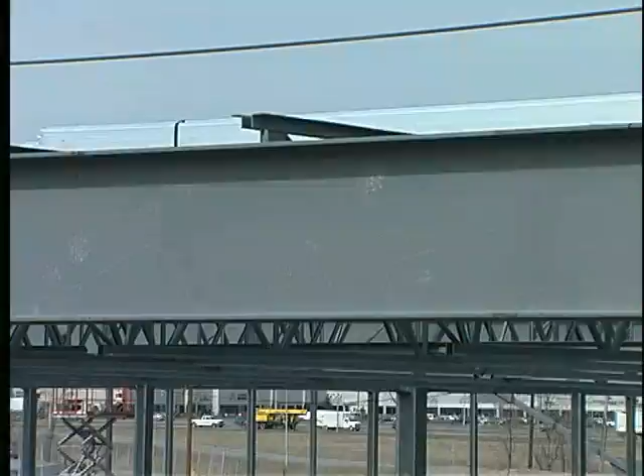The Steel Structures Education Foundation is an organization established to foster increased awareness of steel as a building material and to expand the knowledge and understanding of the use of steel in construction.

Years ago, when we looked ahead to the urban landscape of the 21st century, we imagined a skyline dominated by multi-story buildings. That future is now here. But the modern urban environment has an unexpected number of single-story structures, and many of those are framed in steel. In this program, we look at the design and construction of the single-story building.

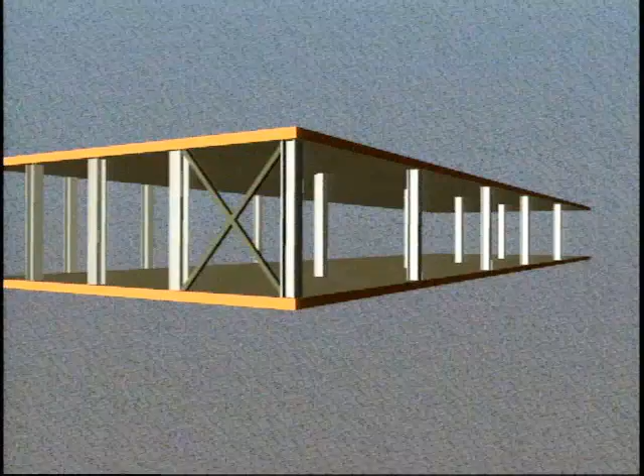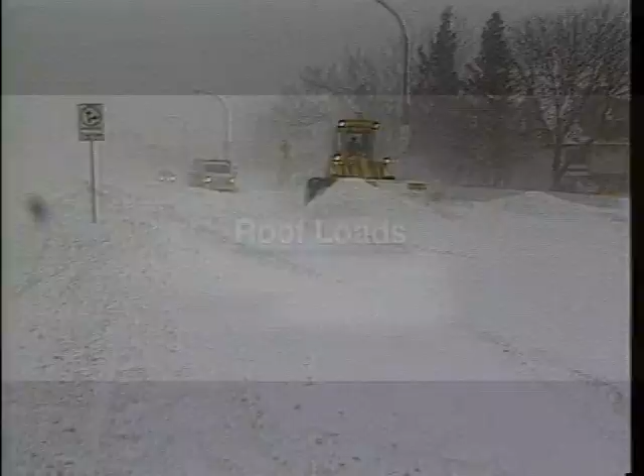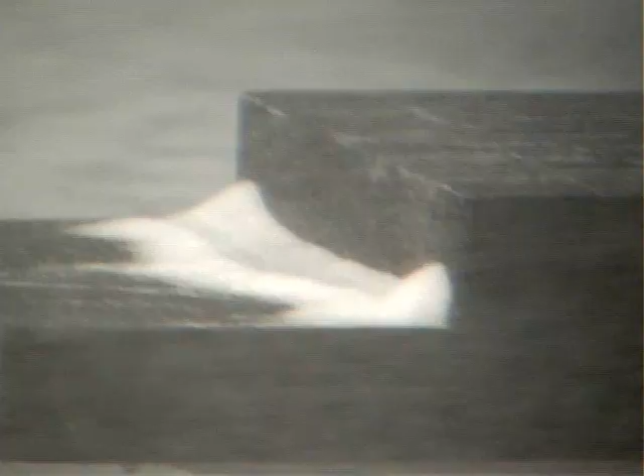We examine the vertical and lateral loads that these buildings must carry and the structural systems used to transfer the loads to building foundations. We start with the loads. In Canada, one of the most severe loading conditions to consider is snow. Snow can pile up locally, especially where there are changes in roof elevation, as this model simulation demonstrates. And when rain is trapped in the snow, the load substantially increases.

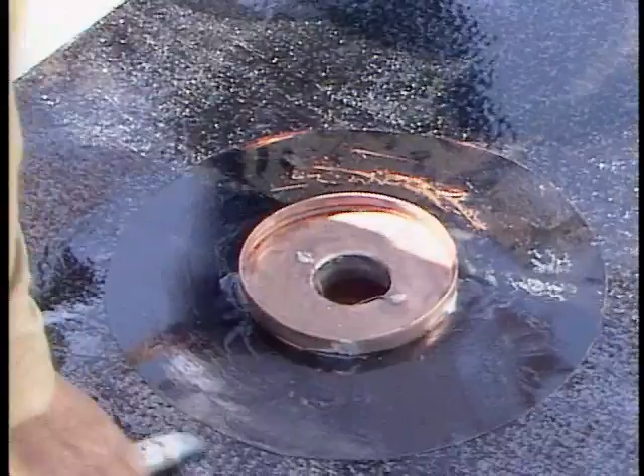It's not surprising that structural failure in building roofs is most frequent under snow load conditions, and rain must also be considered as a separate load source. Designing for rain loading is often compounded by local bylaws. Some municipalities restrict the volume of runoff from building roofs.

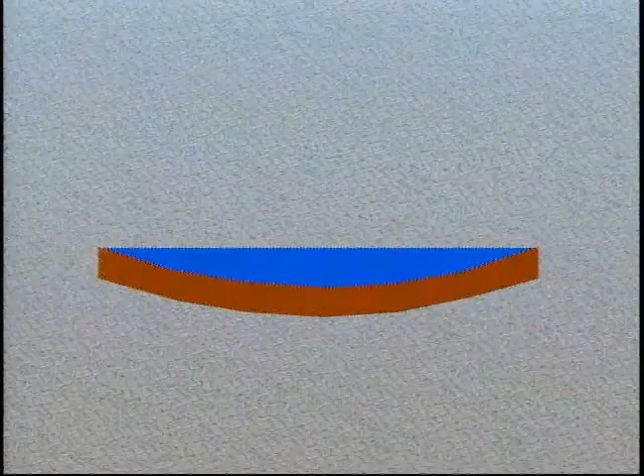In these cases, the design must allow for the extra load of retained water, and the load is not always evenly distributed. Roof frame deflection can cause the rainwater to pond in low areas, causing locally heavier loads. Roof stiffness to avoid deflection and drains at low points are therefore two important design considerations.

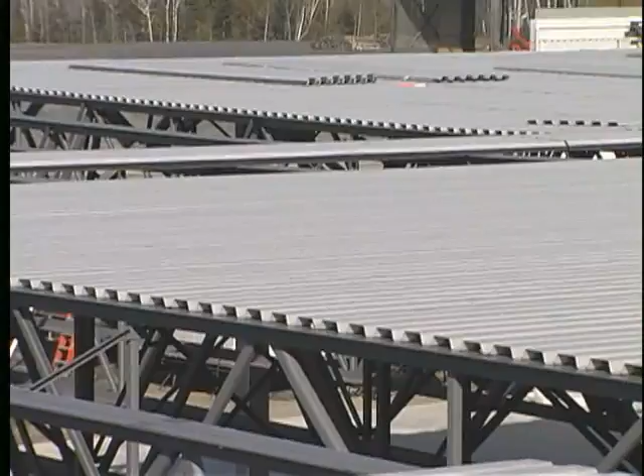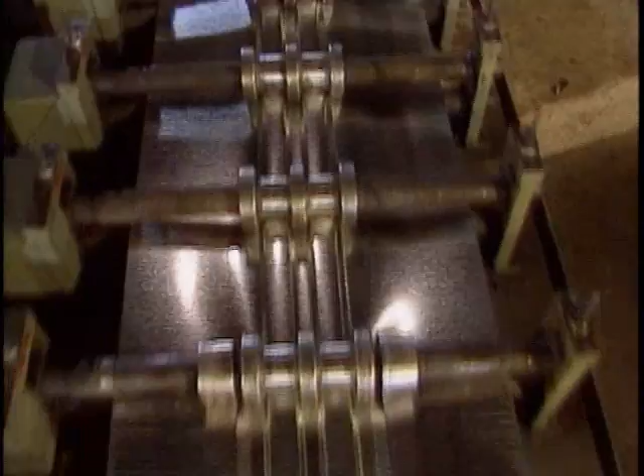To carry roof loads due to snow and rain, sheet steel is the first line of defense. The designer chooses one of a number of standard roof deck profiles based on deck span, sheet steel thickness, and anticipated roof load. A coil of sheet steel is roll-formed into the deck profile selected, and a flying shear cuts it into suitable lengths.

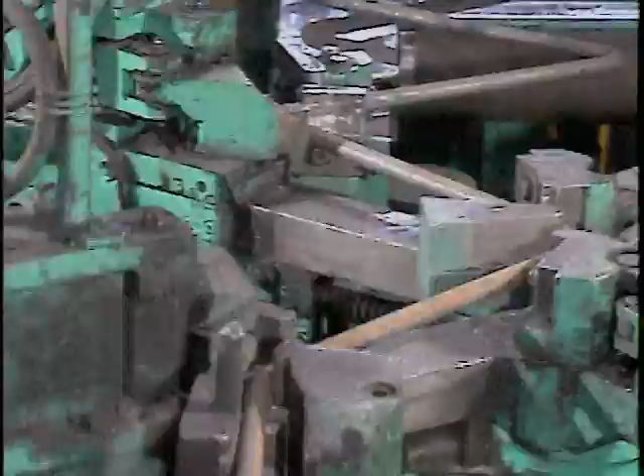Open-web steel joists, simply called joists, support the roof deck. Each manufacturer uses its own proprietary joist design, selecting components that comply with the specified performance criteria. Assembly line fabrication reduces overall costs.

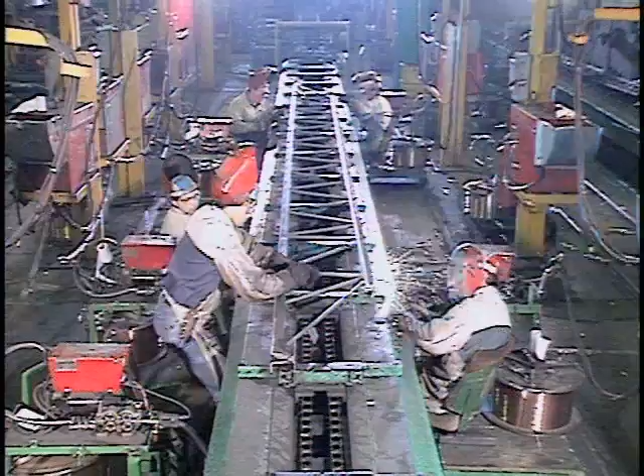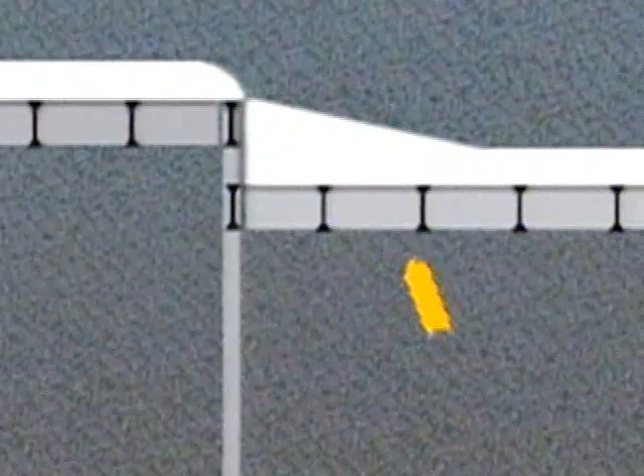In areas where there are extra loads from deeper snow, designers will often call for a joist with a larger capacity to support the additional weight and place the joists at the normal spacing. But the production of these few heavier-duty joists is apart from the assembly line and can drive up costs.

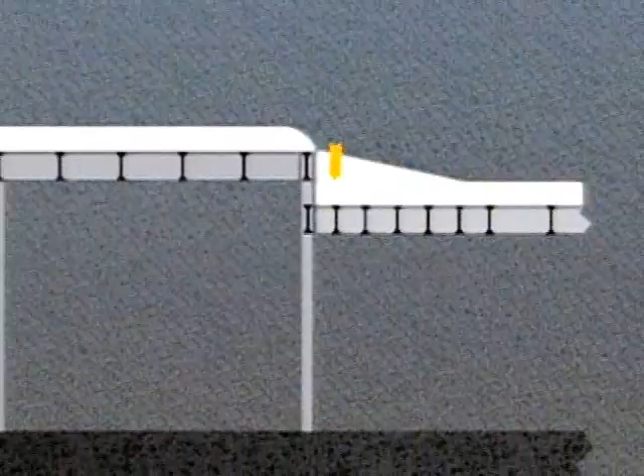It may therefore be more cost-effective to use the same joist design that's in the rest of the roof and place them closer together where necessary to increase load capacity. Reducing joist spacing also reduces the deck span, thus increasing the load capacity of the roof deck. This may also avoid the need to adjust deck strength in areas of heavier loading.

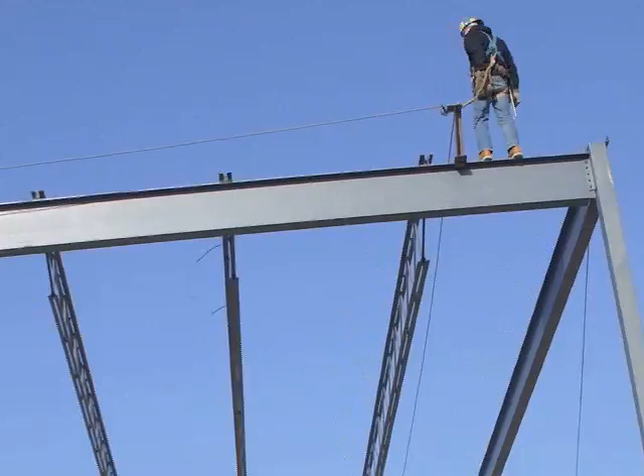The next element in the steel framing of a one-story building is the girders. These are the primary supports for the joists. They are often cantilever girders, also known as Gerber girders, named after the designer Heinrich Gerber. More than a century ago, he used cantilever girders in European bridges to achieve the benefits of continuous girders, with the structure remaining statically determinate.

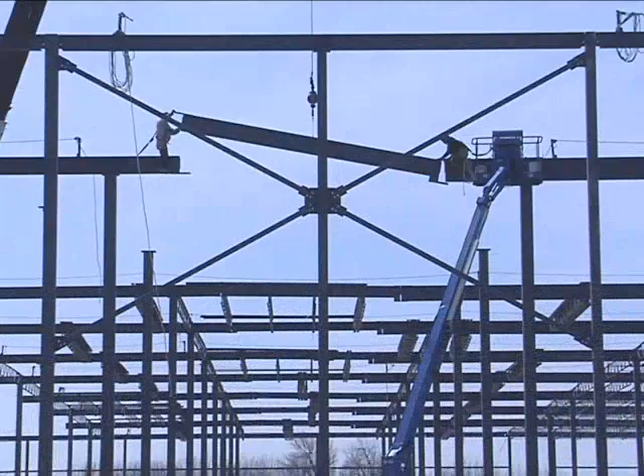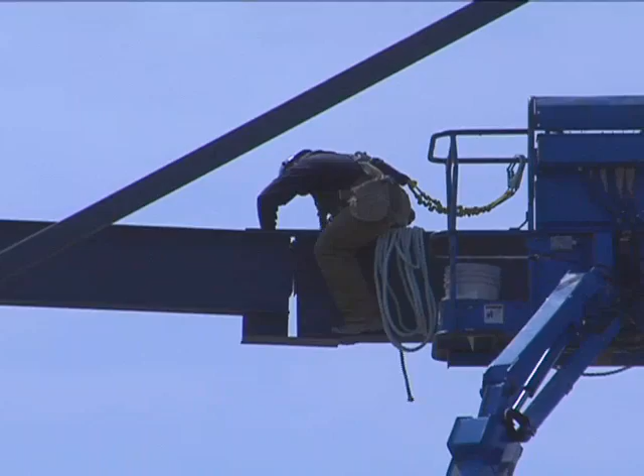In buildings, Gerber girders are continuous over adjacent columns, with simple span drop-in segments attached to the ends of the cantilevers. This continuity over the supports reduces deflections and simplifies connections. The system also derives significant economic benefits from material savings, easier fabrication in the shop, and faster construction in the field. There is one critical fact in the consideration of this design.

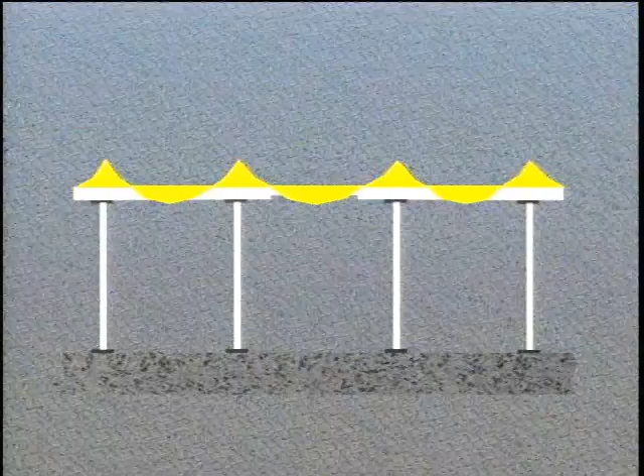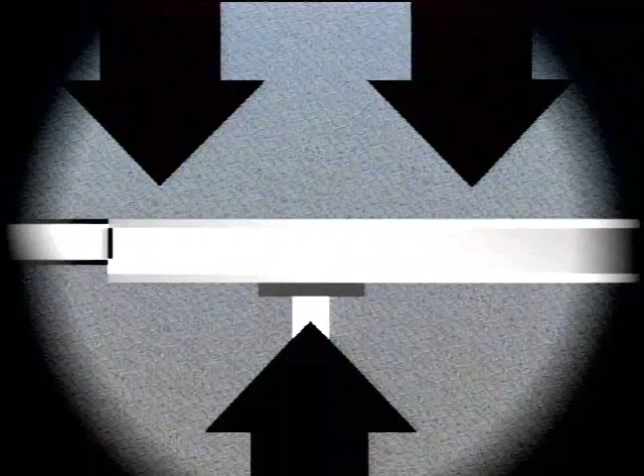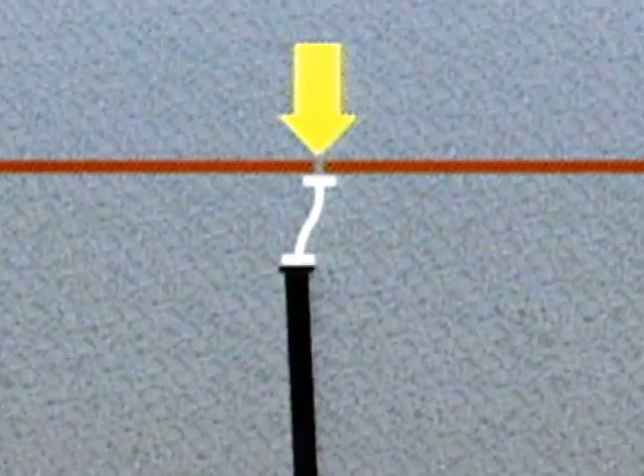The maximum bending moment under uniformly distributed loads frequently occurs over interior columns. This point of maximum negative moment coincides with the maximum shear force in the girder. Therefore, stability of the girder column joint is an essential factor in the design. When roof loads are low, as they are most of the year, the assembly usually remains stable. However, as loads increase, there is a tendency for the bottom flange of the girder and the top of the column to move laterally. This can create instability.

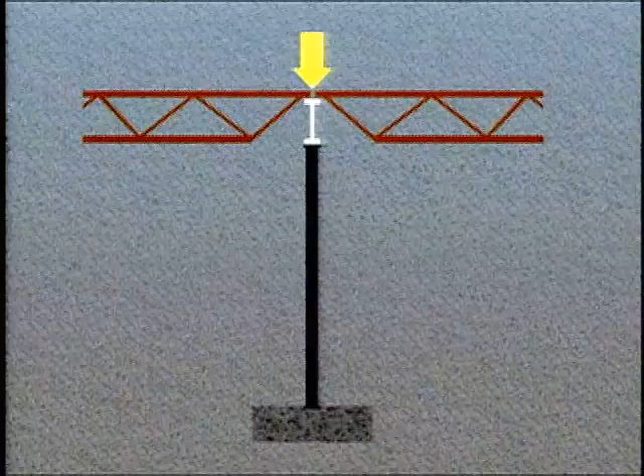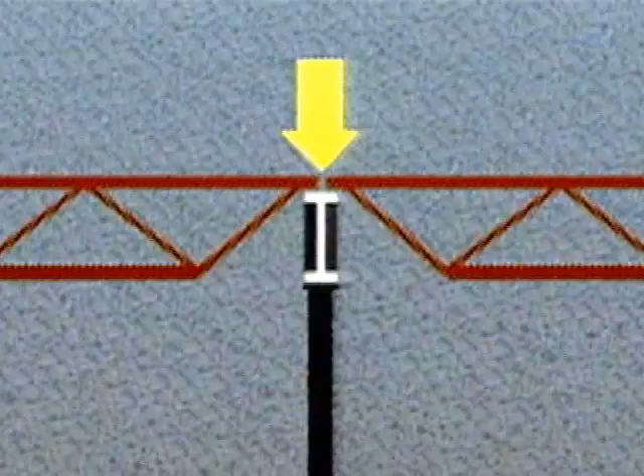The solution is in the framing details that transfer loads to the girder top flange from the joists. Good practice dictates that there will be a joist at or near the column. An extension of the joist bottom chord may be used to tie and stabilize the girder bottom flange, thus stabilizing the top of the column. Alternatively, stiffeners on the girder web above the column may be sized to provide column continuity, joint stiffness, and joint stability. In fact, designers will often combine these two systems for additional safety.

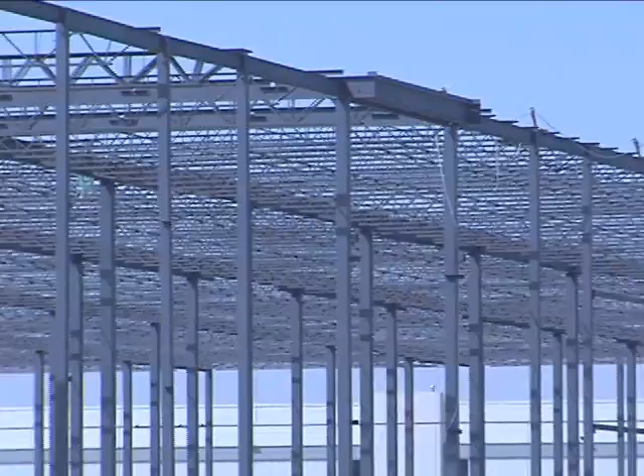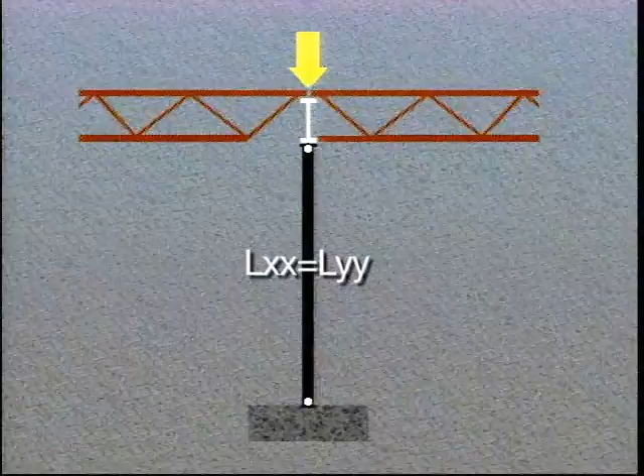Continuing our look at the single-story steel structure, the next step is the columns, interior and exterior. We start with interior. These columns are normally designed as axially loaded pin-ended members that are laterally unsupported along their length. Their design length is approximately the same on both principal axes. This symmetry, combined with compression-only loading, usually makes square hollow structural sections the most economical choice.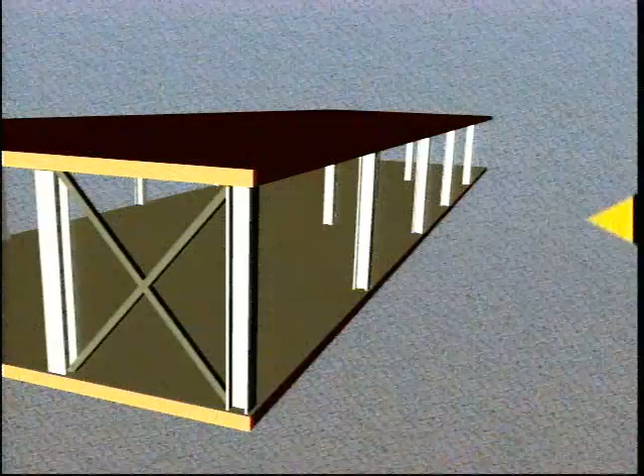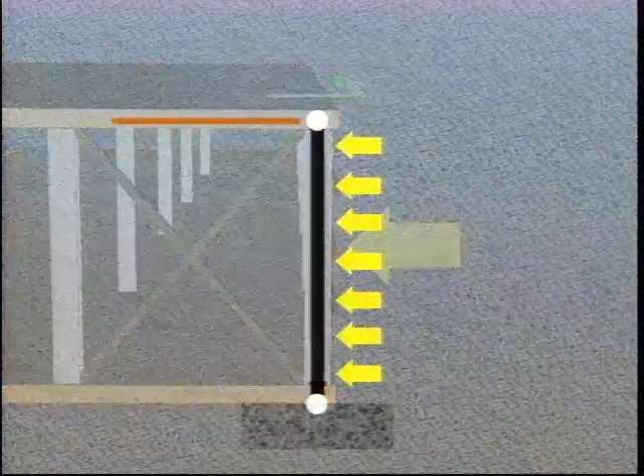Exterior columns often involve a different set of design criteria. First of all, there are wind loads to consider. Wind produces loads on both the windward and leeward faces of the building, as well as uplift forces on the roof. Sometimes building walls are capable of spanning from the foundation to the top of the building. This distributes wind loads in more or less equal shares to the roof level and the foundation. In these cases, the exterior columns can function primarily as axially loaded members.

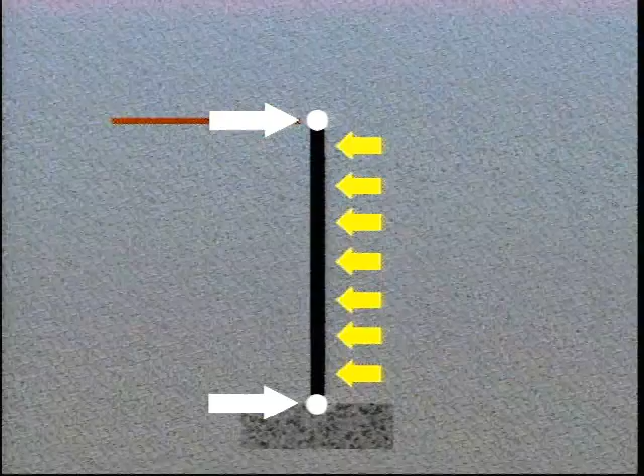However, much more frequently, the wall consists of cladding that is attached to the exterior columns. Wind loads on the cladding are locally transferred to secondary framing members called girts, and from the girts to the exterior columns.

Girts are used in a horizontal plane with sag rods to support them temporarily, and with their spacing usually determined by the load capacity of the cladding panels. The columns then must support both wind loads on the wall applied through the girts and axial loads from the roof. In many cases, girts are attached to columns on their outer flanges.

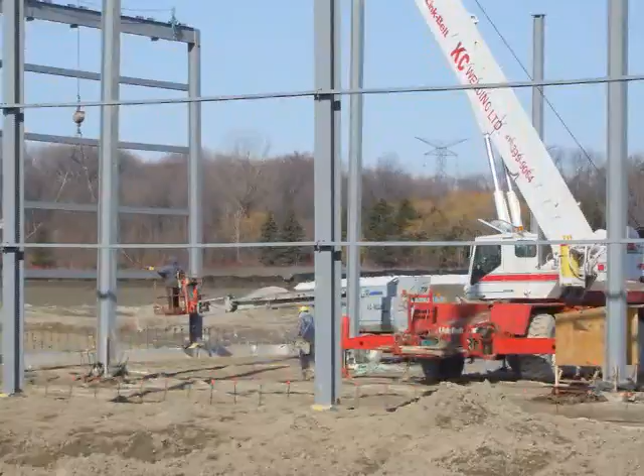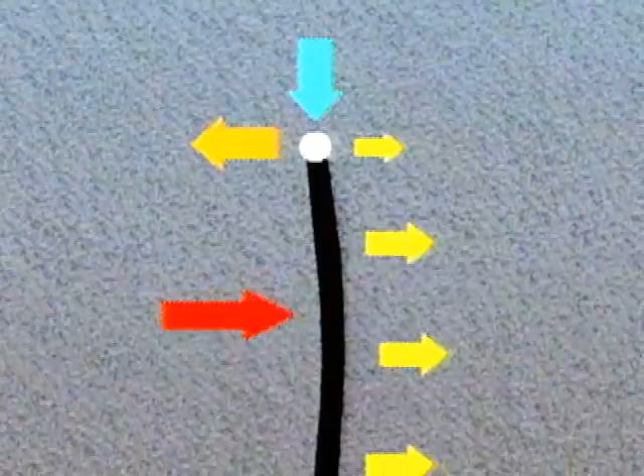These horizontal loads may reverse with the wind direction, which makes it necessary to consider stability of the inner column flange. To supply both axial load capacity and bending capacity, designers will usually choose a column with greater strength on its primary axis, such as a wide flange column section.

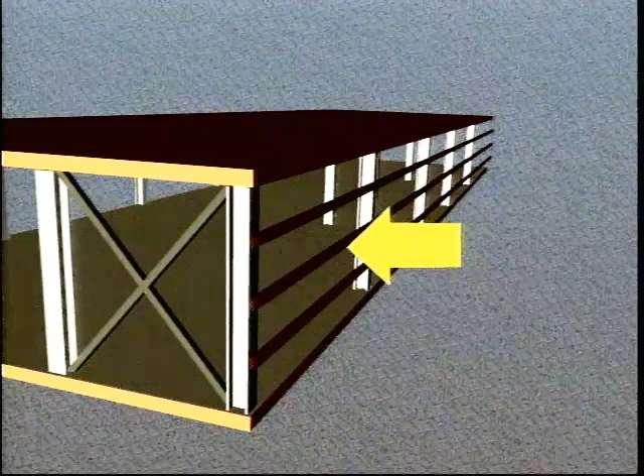The spacing between primary exterior columns is usually a reflection of the interior column grid and may be too great for economical spans of the wind girts. Secondary columns placed between the primary columns will reduce the girt span. These additional columns are known as wind columns. In fact, they might well be called wind beams because their major function is to resist horizontal loads from the wind girts.

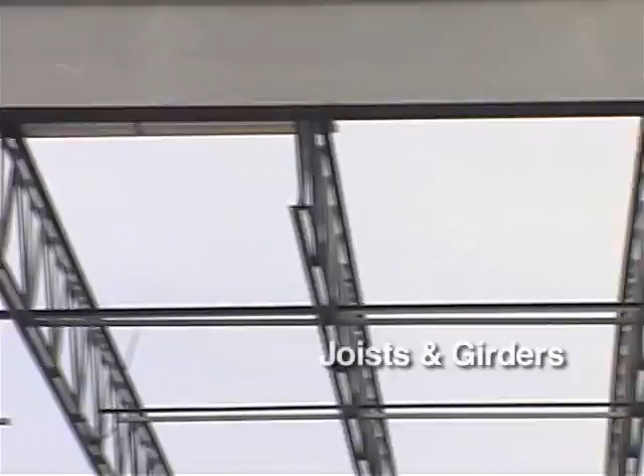These are the main framing elements in the construction of a single-story building: the roof deck, joists and girders, interior and exterior columns, girts and wind columns. Now, let's see how these framing elements work together in tandem with the bracing to provide overall building stability under gravity loads and to resist horizontal loads from wind or earthquake.

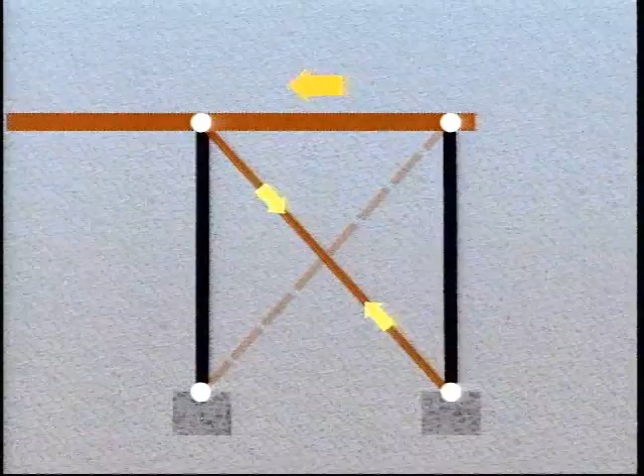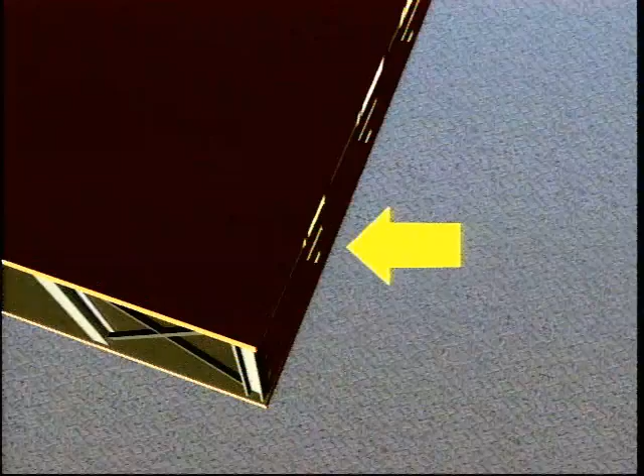Loads at the bottom of exterior columns are transferred directly to the foundations. Loads at the top of exterior columns must be resisted at the roof level. The designer must find a way to distribute these horizontal loads to bracing elements, which quite frequently can only be accommodated along the perimeter of the structure. How do designers transfer loads to these isolated elements? Most often, they use the roof as a structural diaphragm.

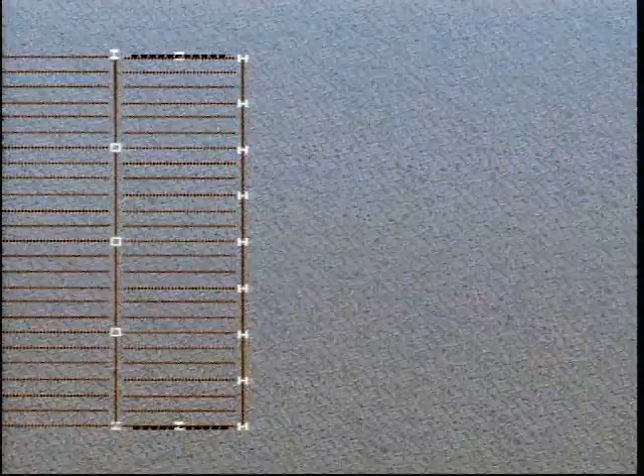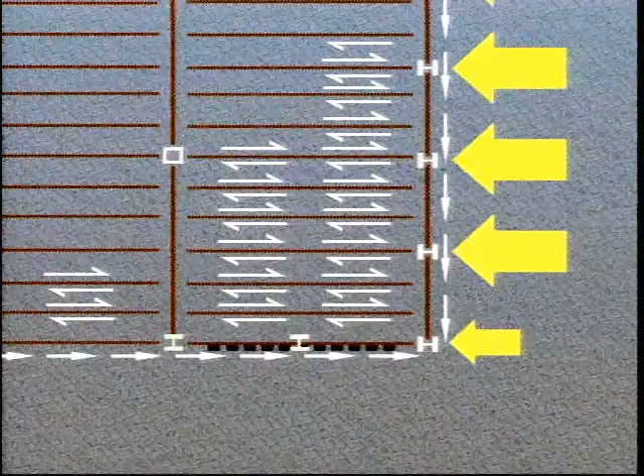A steel roof deck with joists acting as stiffening elements forms the structural diaphragm, which must have the capacity, both overall and internally between adjacent elements, to transfer forces across its width. In addition, the boundary of each diaphragm must have sufficient connections to transfer forces through bracing elements to the foundations.

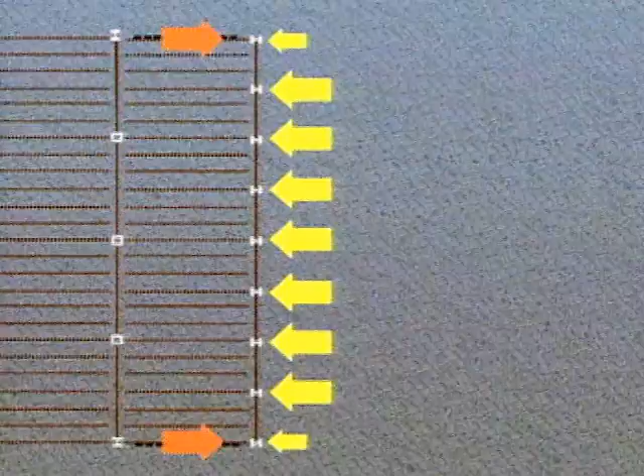Sometimes a steel deck diaphragm alone may not be capable of distributing forces applied on the building. In such cases, a bracing system in the plane of the roof supplements the diaphragm locally where stresses are high, or may even replace the deck diaphragm.

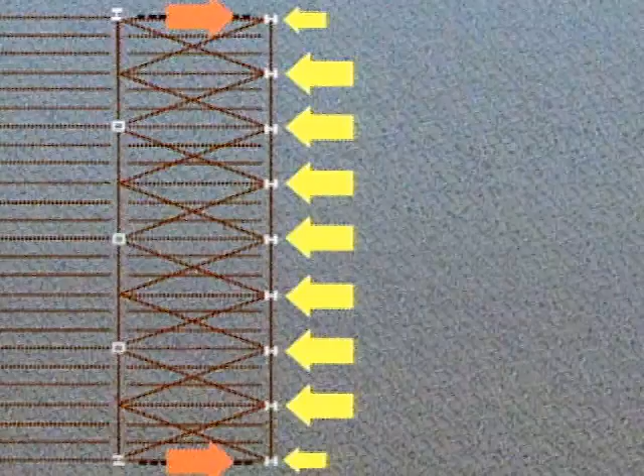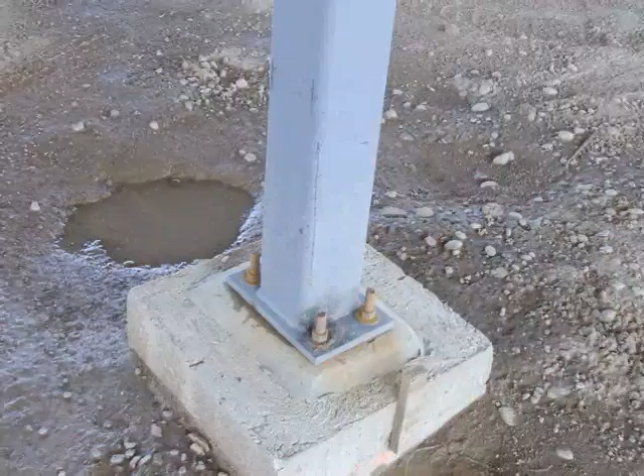Now that we have seen the loads and the components that support them, let's look more closely at actual site construction. The building contractor constructs footings to plans and specifications, complete with anchor bolts. The shop fabricated columns with base plates are erected and shimmed to the correct elevation, ready for grouting. As an alternative, leveling plates can be installed and grouted before the columns are erected.

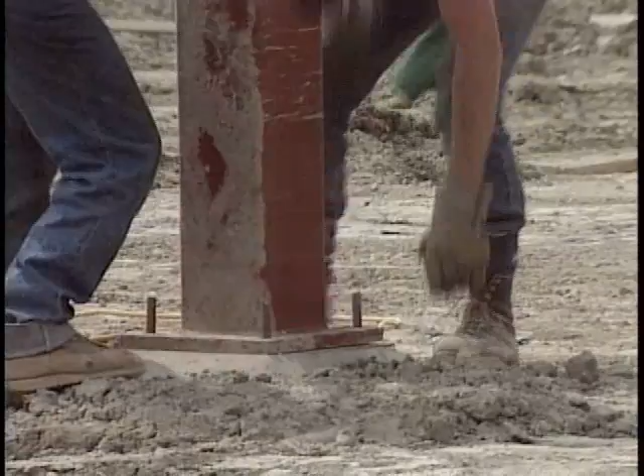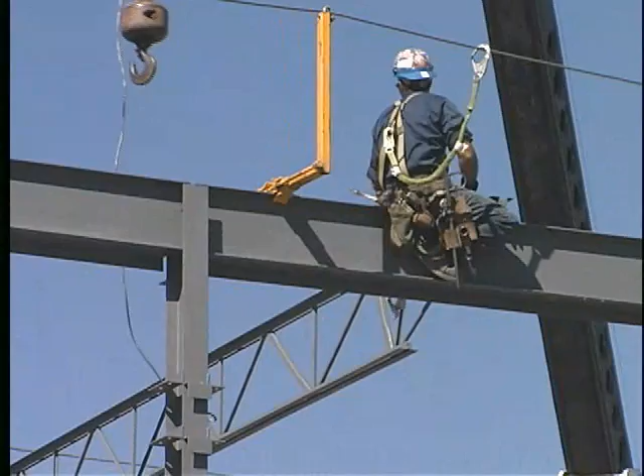After several columns have been bolted down, the cantilever segments of the girder system are erected. Drop-in spans complete the lines of the primary framing elements. Usually a tie joist, that is, a special joist with a bottom chord extension, is placed on the column grid lines. Erectors use this bottom chord extension, along with plumbing cables, to plumb the frame.

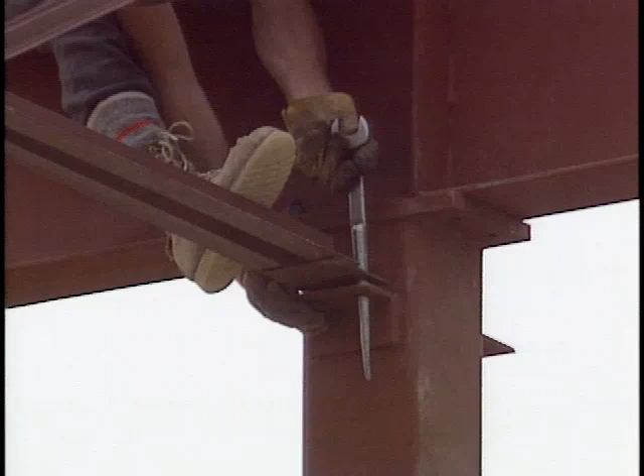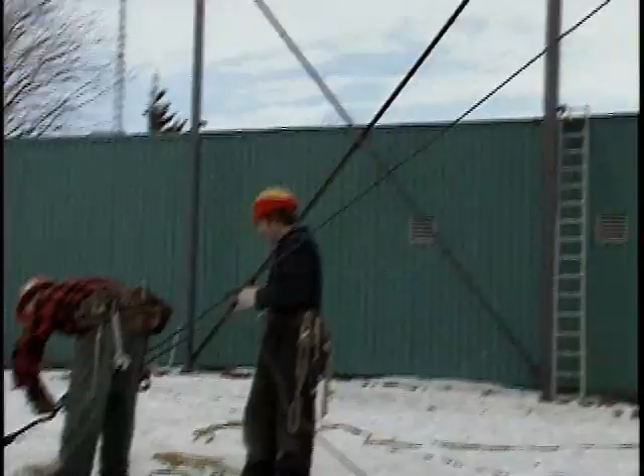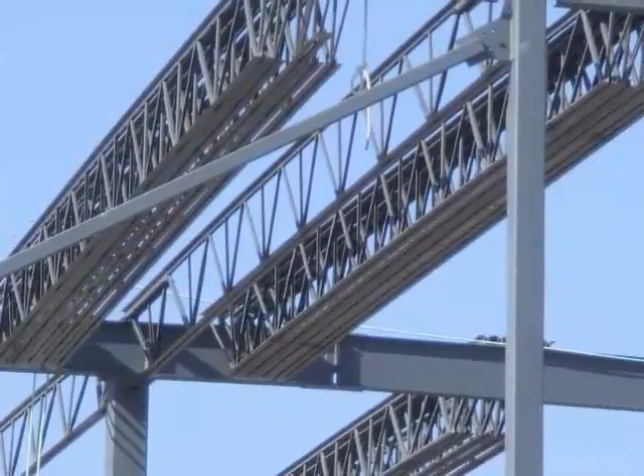This is the point in the girder where we see the large negative bending moment discussed earlier. To stabilize the joint, we connect the joist bottom chord, ensuring stability of the girder bottom flange and the top of the column. After girders are placed and stabilized by tie joists and plumbing cables, bundles of open web steel joists can be placed on the frame. They are then spread to the specified spacing and attached to the girders by bolting or welding. Bridging is then installed to brace the joists.

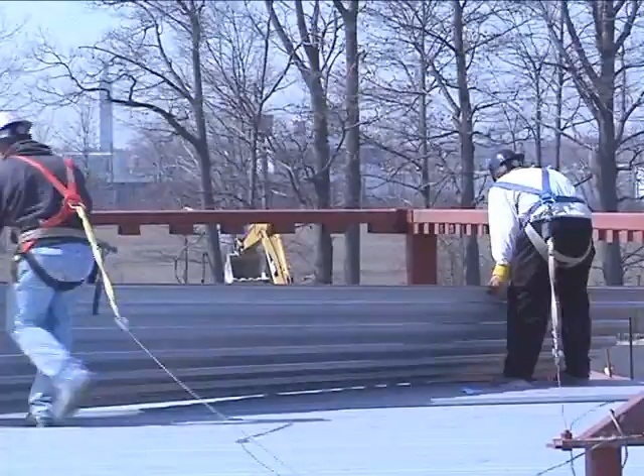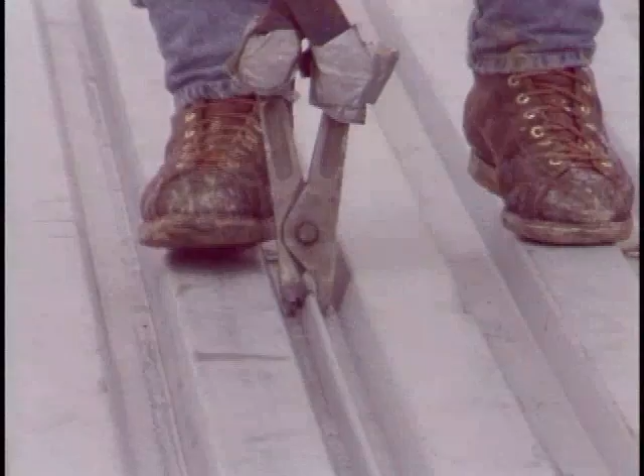With joists and girders complete, the third element in the roof structure can be laid, the steel roof deck. The erector places panels side by side on the joist top chords and welds or mechanically attaches each to the joists. Side seams are connected for vertical load carrying capacity, with additional connections for roof diaphragm capacity if required.

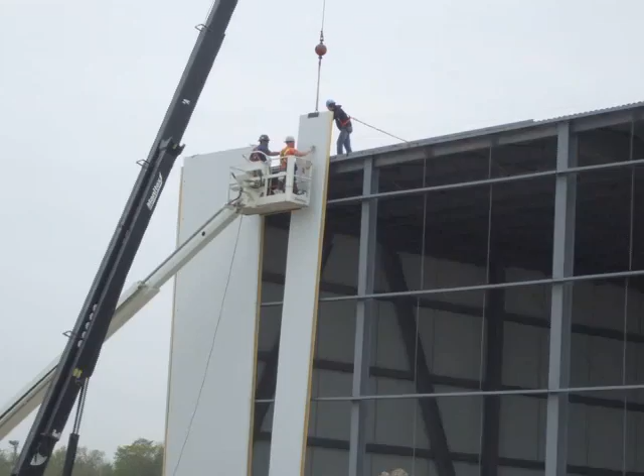Now, let's take a closer look at the building wall. There are many different wall systems to use. Wall panels may be factory manufactured, and these large elements are shipped to the site. The wall may also be manufactured in the field, beginning with a liner sheet attached to the structural girt system, followed by subgirts, insulation, and finally, the exterior finish panels.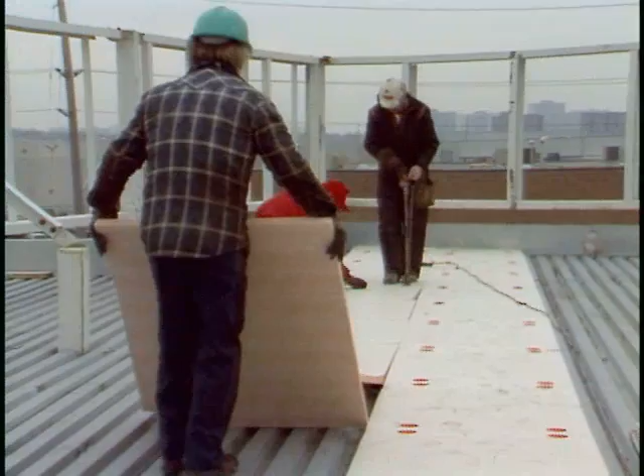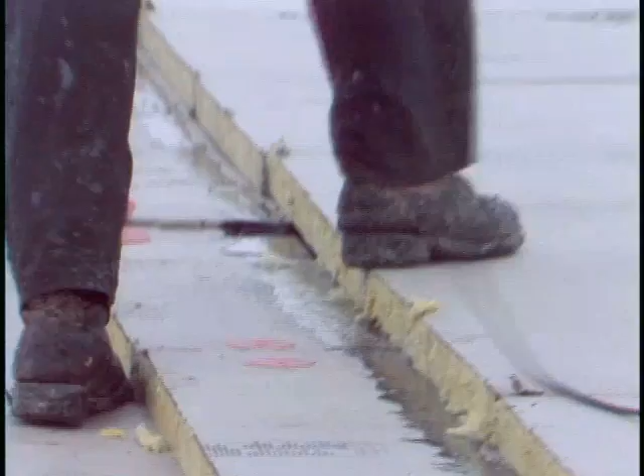As the wall cladding is installed, one other construction process is underway, the completion of the roof system. One common roof system calls for insulation to be placed on the roof deck and connected to the deck to keep it in place. The thickness of the insulation varies with the temperature requirements of the occupants and the energy conservation philosophy of the building owner.

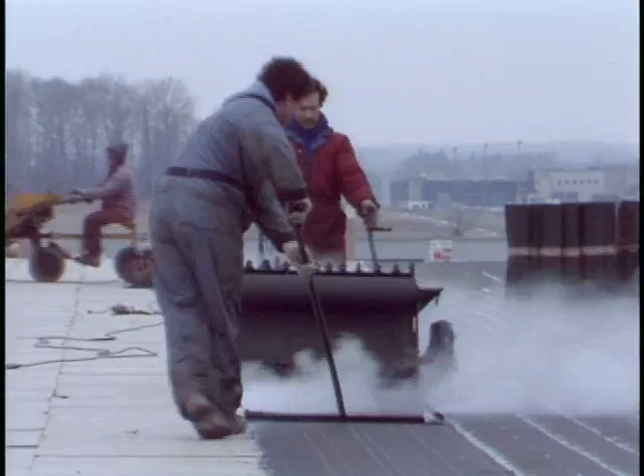The waterproof coating on top of the insulation is usually several layers of asphalt paper bonded by hot asphalt and protected by a layer of fine gravel. The basic structure of the building is now complete and work on the interior begins.

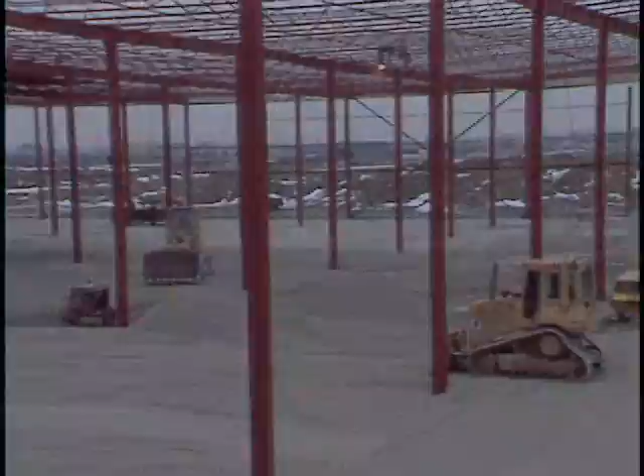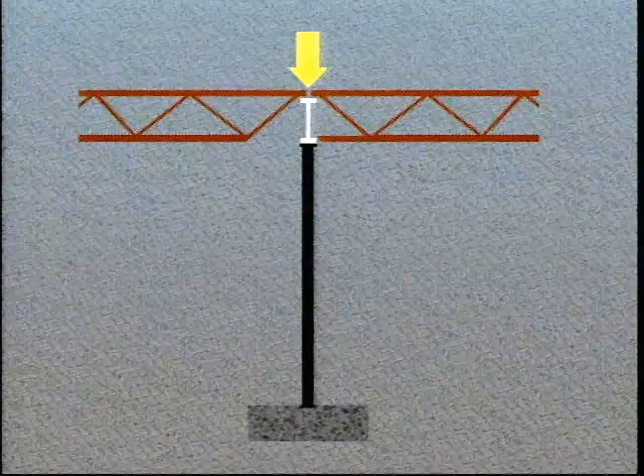In this program, we have examined the elements used in the construction of a single-story building. We have seen how each framing element plays a key role in transferring vertical and lateral loads to the foundation, and we have followed the assembly of these elements into a cohesive design. The final structure ensures the stability of each framing component, as well as the overall stability of the building.

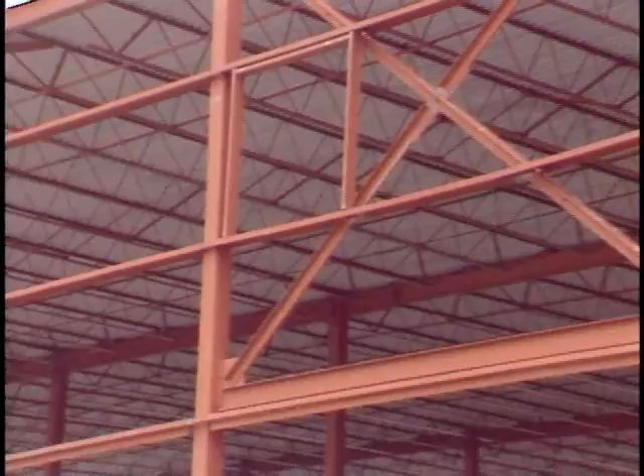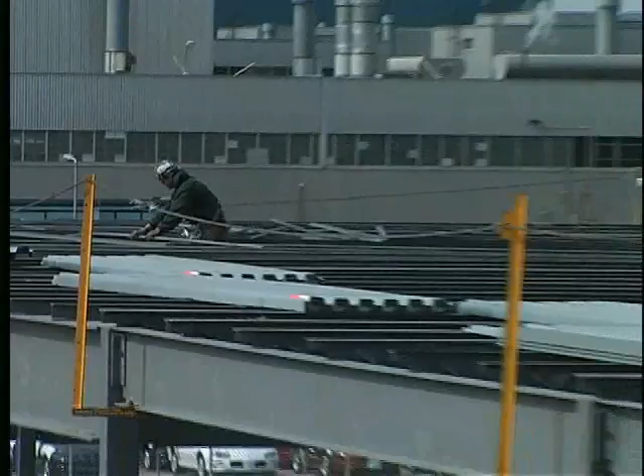As the frame is enclosed with its architectural finishes, a new workspace is complete. Each structural element complements the others, often acting in a dual capacity, and the architectural finishes may also contribute a structural function. We have met the engineering challenges of a single-story building. We have produced a highly optimized yet repetitive and economical design, and another functional, attractive building has been added to our modern urban environment.